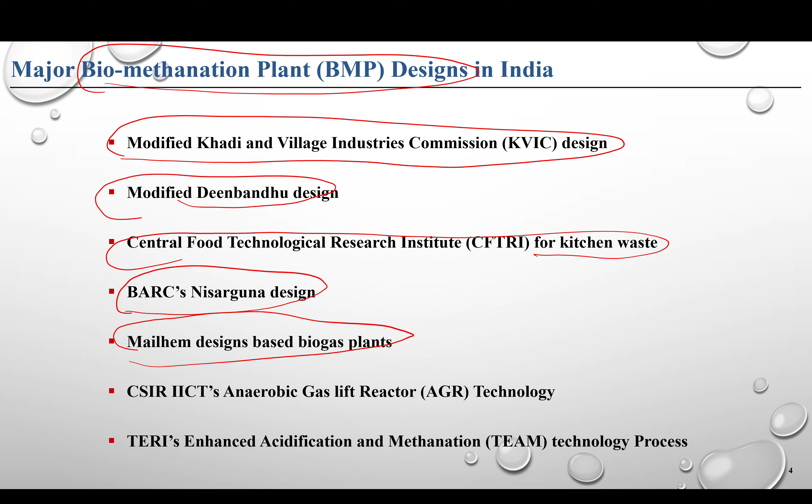So while we went on these visits to different plants across India, we found these are the major biomethanation plant designs in India. It can be the KVIC design, the modified Khadi and Village Industries Commission design. It can be the modified Deenbandhu design. It can be the CFTRI design, which is mainly for kitchen waste. It can be the BARC Nisargruna design, or there is Mailhem's design. Mailhem is one of the biggest companies that has biomethanation plants in India.

And then we have CSIR-IICT's AGR technology, anaerobic gas lift reactor, and then you have TERI's TEAM technology, so enhanced acidification and methanation technology. So these are basically the different sets of designs that we found, where we did this analysis and found the different types of biomethanation plants and the designs that were prevalent in India.

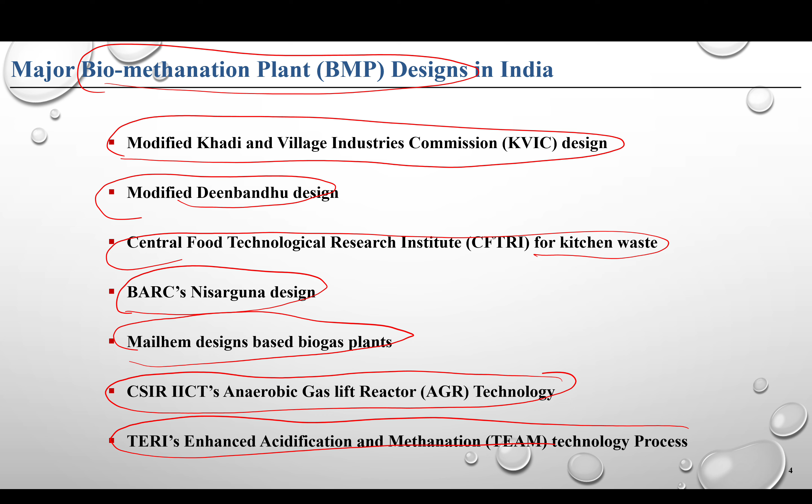Now coming to the data that we got, so if you see, majorly the plants that we have visited, we found the plants to be operational. Almost 88% of the plants were operational in India, and a small number of plants were not operational. The plants that were not operational were found to have stopped working during COVID, or just when COVID came. And what happened is that once COVID came, the waste input stopped, and slowly the reactor stopped working.

And then the municipality or the ULB did not take some effort, or did not do the retendering and manage the start of the biomethanation plant, and it was shut down completely. This is the fate of the five biomethanation plants in Delhi. So actually Delhi doesn't have any biomethanation plant as of now. The Delhi NCR has biomethanation plants, but not Delhi. Greater Noida and other places have biomethanation plants, but not Delhi.

The plants in Delhi were all operational before COVID, and after COVID they did not operate because of lack of waste. The manpower did not come, and then the operator ran away, something like that. Non-functionality was mainly because of the lack of funds, administrative issues, the tender getting expired, and all those issues. In some cases there was public opposition as well.

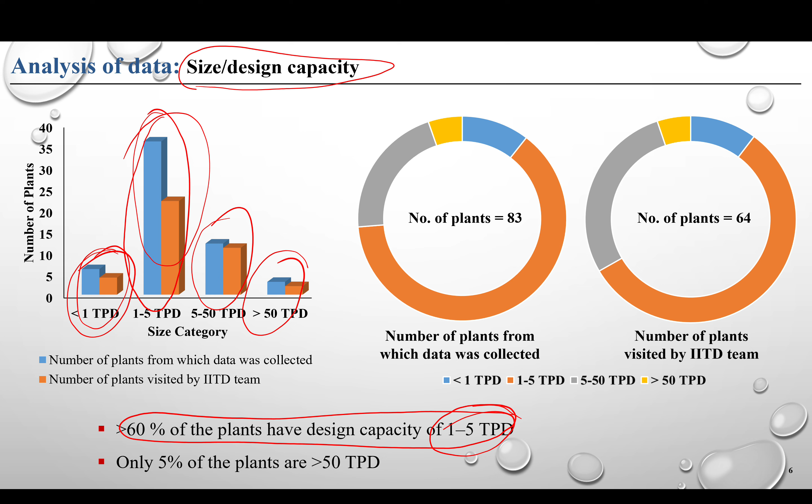We have some bigger plants as well. If I give you examples, in Pune city they have plants. They manage it in a decentralized way, and they have plants ranging from 5 to 10 TPD across various places throughout Pune city. But generally we have seen plants in the range of 5 TPD only, not beyond that, mainly because of financial and space requirements. And making a centralized big plant, like Indore is doing for the entire city, is not always feasible in India because of space and funds.

In terms of digester type, mainly we have seen three different types of digester prevalent in the biomethanation plants. It can be fixed type, floating type, or container type. In some of the cases we did not get any information on how they designed the biomethanation plant. So in fixed type, the dome is fixed and the dome doesn't float.

Or it is basically fixed to the boundaries, and whenever the gas is formed, it is just pressurized in the dome, and it goes for purification, or to the next chamber for purification or for conversion into electricity. In floating type, the dome is floating on the water, so it is sealed with water, as we generally know how the biomethanation plants are designed.

So floating type, they have major issues in terms of the gas getting leaked. So if you have too much production of gas, maybe because of temperature, maybe because of very good quality of organic waste, in that case the gas leaks out of the floating type digester, and it's basically wasting your resources. So the operators, the designers, they generally moved on from the floating type digester to fixed type digester, and hence we found that fixed type digester was more prevalent in the biomethanation plants.

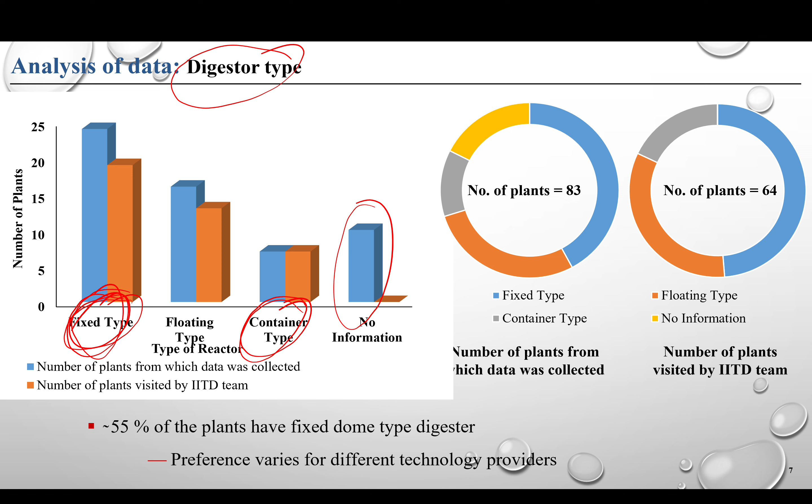In some cases we also got container type, so basically it's a cost effective solution. They have a container, and then they try to make a biomethanation plant by just making some holes and doing some connections in terms of pipes, and that is the most efficient way to do it. But mainly we found that fixed type is the prevalent type of digester available in India.

In terms of stages of digestion, we generally know there are two stages which is used across Europe. Either it can go for thermophilic and then mesophilic, or it can be both thermophilic, or it can be both mesophilic. So in India, we also have almost both the different types of design. Slightly the two-stage digester, where the new digesters were coming with a two-stage mechanism. So in that you have either a first stage aerobic and then the anaerobic one, or you have both the anaerobic stages. Mesophilic and then again mesophilic, or thermophilic and then mesophilic.

And then you also have a single stage digester. So generally what we have seen is that for the single stage digester, the methane yield is less. If you're going for a two stage digestion, the process is more efficient, and you get more methane yield. That is what the data we got while we did this project. And the single stage also requires less space, but two stage requires a little bit more space, more cost, and all those things. But overall you get more methane and biogas yield.

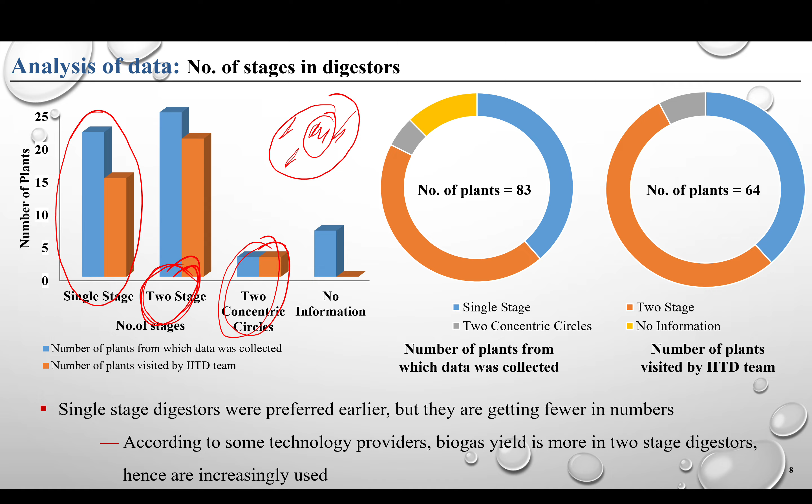You also have two concentric circle based design. You have one circle like this, and you have another circle like this, two tanks where inside you have maybe a thermophilic zone, and then you have a mesophilic zone. So you are basically combining two single stage digesters in one zone. So that also was seen in some of the cases where they are doing biomethanation. Again, this kind of design saves space, but it requires a lot of management in terms of design and operation.

In terms of digestion process, you have two types of digestion process. Either it can be high rate or it can be low rate. In high rate, generally what we consider is that if you are either heating the reactor, or you are mixing, or you are providing both, then we consider them as a high rate digester. If you are not doing any one of these, we consider them as a low rate digester. So in high rate digester, as the name suggests, you will produce more methane yield because you are providing mixing, you are providing heating.

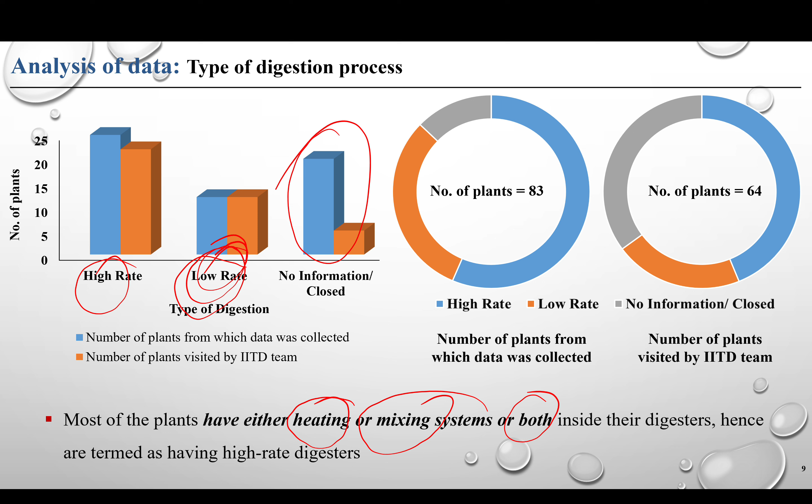And the low rate digesters are the old digesters, generally what we have seen. So the methane yield is less compared to the high rate digestion process. And in some of the cases, we were not very much sure about what was going on inside, because the operators and the person responsible, they don't know whether heating is going on inside or not, or mixing is done or not. So these are some of the challenges that we have faced, and I will discuss that in the later part.

In terms of inoculum, it is also very important, because that is the main microbes that are going to work for this biodigestion process. Prevalently it was cow dung, which is easily available in India, because we have a lot of cows, and a lot of places where we see a lot of cow sheds. So they get cow dung very easily. So generally they use cow dung for inoculation in the biomethanation plant. But in some cases, we have seen that cow dung is also added with some bacterial culture. So they take the bacterial culture from various labs.

Okay, they have some culture that can reduce your startup time. So they add cow dung, and with that they add the bacterial culture as well. And every 6 months or maybe 1 year, depending upon how quickly your reactor is getting upset, they add again cow dung and the bacterial culture regularly for proper maintenance.

In some cases, we have also seen cow dung and jaggery both are used. Sometimes they use cow dung and jaggery, or sometimes cow dung and bacteria, or maybe jaggery and bacteria, because sometimes cow dung is not available in some places, in the plants that are in the city area. There getting cow dung is not that easy, so for that case they add jaggery. And they also add some enzymes and some bacteria from private labs. They buy it from the lab, and then they add that as well.

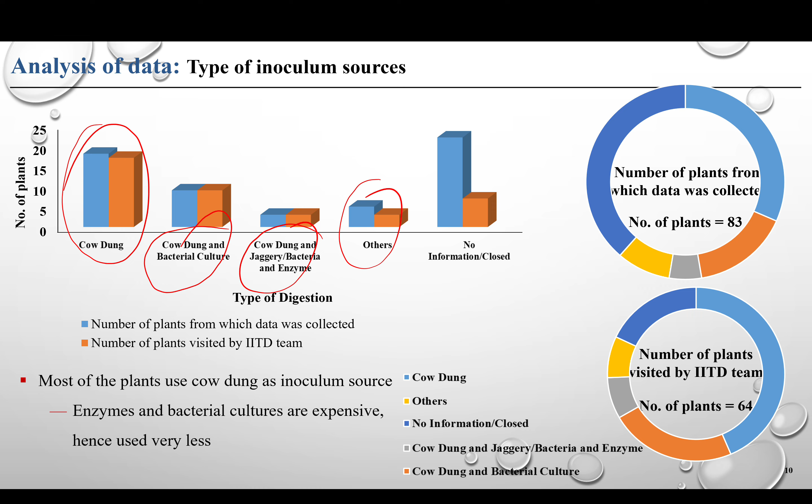In a few other examples we have seen, they are adding sewage sludge as well, or the raw wastewater as the inoculum, because they don't have any other source. But mainly what we have seen is the cow dung is the most prevalent inoculum source for this biomethanation plant.

So overall, how the biomethanation plant operates and what the process in India is, I can show you here. We generally know what happens in a biomethanation plant, but this is what really happens in the biomethanation plant in India. So first you get the mixed household waste, basically the unsegregated municipal solid waste, where you have the plastics, the organics, and everything inside.

And generally, what I have seen is that none of the cities are doing segregation, which is one of the important things if you are applying any process for management of municipal solid waste. Only Indore is doing almost 90% or maybe 95% segregation, and they are following a good model of implementing it with NGOs and fining the people if you are not segregating your waste at home. So if you leave aside Indore, it's an exception for India.

The biomethanation plants get this kind of mixed waste, and the mixed waste is first of all segregated just before the waste is received in the biomethanation plant. They have a segregation unit maybe just before the plant, or inside the plant campus they get the waste, and then they do manual segregation. They segregate the organics and then the inorganics. After the first stage of segregation, they again do some pre-processing.

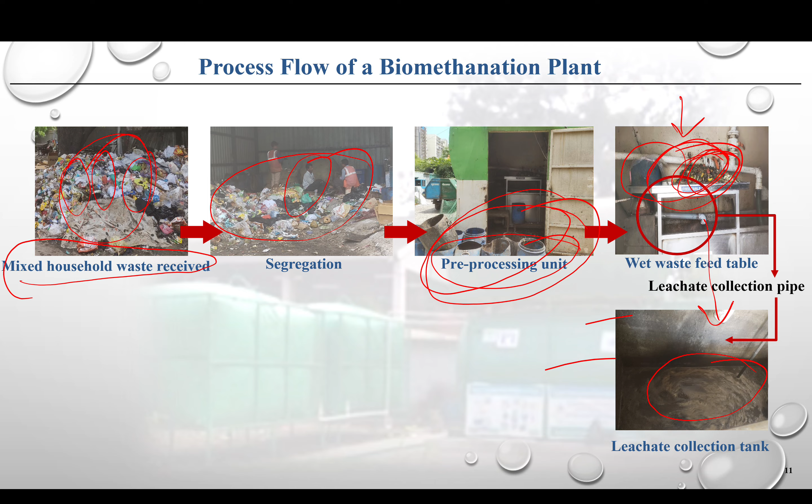So basically they make a slurry out of it, and after mixing and grinding, it becomes a leachate kind of thing, a black slurry. This slurry is collected in the leachate collection tank, and then it goes to the digester. Some part of the leachate is recirculated back into the process itself, because they maintain the amount of microbes, or increase the retention of the microbes in the digestion chamber.

And it also decreases your consumption of fresh water, because you need some water when you are grinding the organic fraction of municipal solid waste and making leachate. So that is one of the advantages of recycling the leachate. And in the output, you have the slurry, the digestate, that is coming out.

Generally the output slurry is kept in a drying bed for maybe a few days, because it will dry, and after drying it becomes a kind of organic fertilizer which can be either discarded or sold to the villagers or to the farmers.

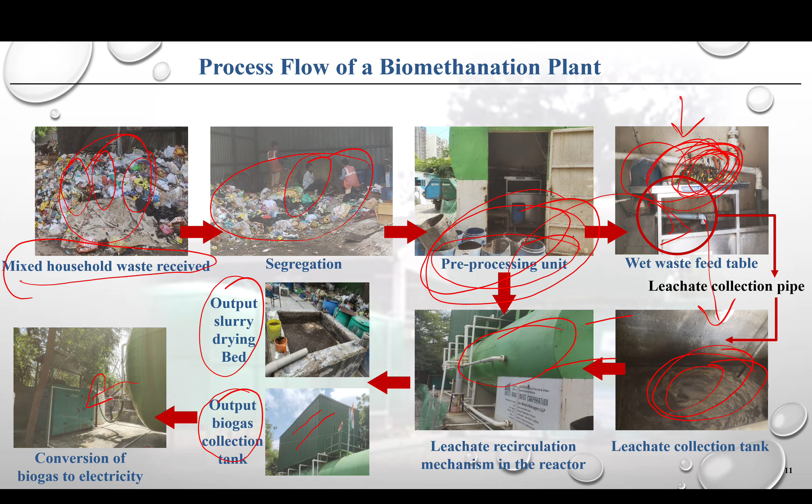And you also have the output biogas. Generally the output biogas is collected on the top of the reactor, and in most cases this biogas is unpurified. They don't purify this biogas. They have a biogas diesel engine, a kind of modified DG. So they just pump this biogas into the DG set, which converts it into electricity, and this electricity is very small in amount, so they don't sell it back to the grid. They just use it for their own captive consumption, which reduces their operating cost.

Overall, biogas is one of the main outputs of the biodigestion or biomethanation process. We can also have bio CNG, but bio CNG has more than 95% methane, which requires proper processing of the impure biogas from the biomethanation plant. So you need to have a purification system installed, and once you get bio CNG, you can cascade it, bottle it, and sell it to industries or anyone who wants to use it, or it can be converted into electricity and given back to the grid.

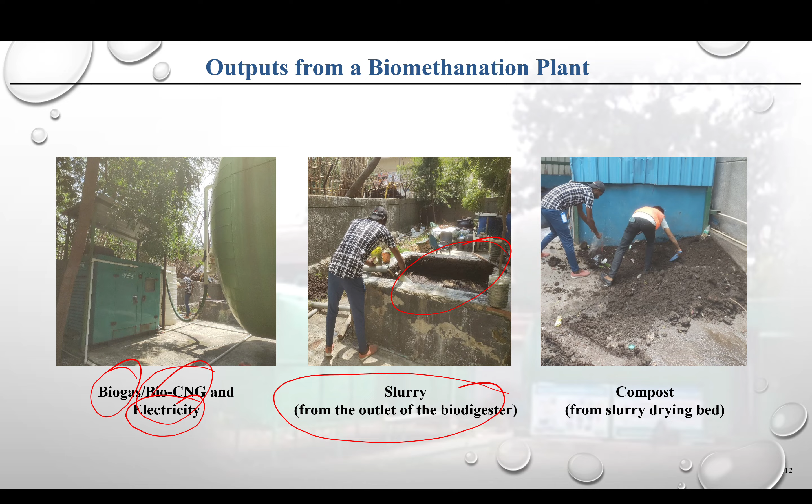We also have slurry coming out from the biomethanation plant, from the digester, and this slurry has to be dried, and after drying, some part of the water or digestate is recycled back, as I told you. And you also have the compost, the dried part. This slurry can also be sold, and it is sold in India as a liquid fertilizer in many places like Ahmedabad and Pune. They packet it and sell it at around 500 rupees per kg, and it is widely accepted at this price in many places in India.

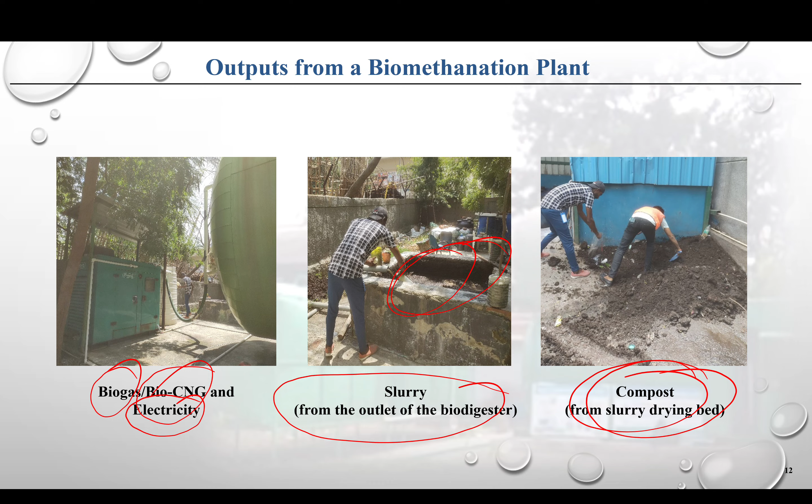In some places like Delhi, they are not able to sell the slurry or the compost, because there is no farming, and people have a stigma attached to this kind of compost. They say it's a waste thing, it will kill your crops and all those things, so they are not able to sell it. They have to just dump it in low-lying areas.

So coming to the observations and recommendations after this entire project, and the feedback we can give to the ministry, because it was sponsored by the ministry. First of all, we found that there is no record of design available on site. If you go to an STP, the sewage treatment plant, or a WTP, we at least have some record of design, like the design HRT and all those things. But at a biomethanation plant, there is no record of the design, at what temperature it is going to be operated, and all those things. So we don't have any information on that.

Waste segregation, as I told you, is a major challenge in India, but if waste segregation is done, these plants will be easy to operate, because you will be removing one extra step where you do the segregation and then go for biomethanation.

And what we found is that in the southern states, the plants are operating well, they are functional, and they are able to generate a good amount of methane, mainly because the temperature in the southern parts is higher compared to the northern part of India. In Delhi, the temperature goes down to around 5-6 degrees at night in peak winter, which is very bad for a biomethane reactor.

And the optimum temperature for biomethanation is around 40 degrees centigrade, which is very close to the temperature that we see in southern states. If we talk about bio-CNG and bottling plants, in that case, they are mostly profitable, especially for the bigger ones. So if you talk about bottling for the smaller plant, no, that is not a good option, because it will not make sense profitably. So generally what we found is that if you go for bigger plants, around 30 to 50 tons per day, in that case bottling and selling the bio-CNG is profitable.

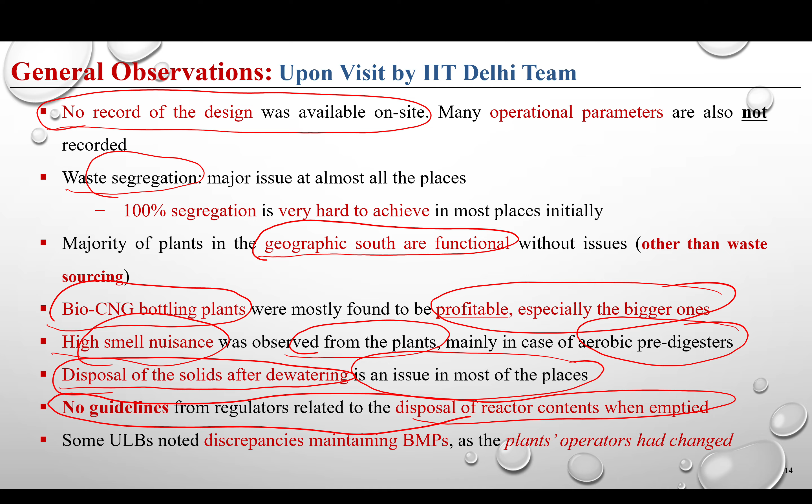There are no guidelines in terms of disposal of the reactors whenever they are emptied. Suppose a biomethane reactor is emptied, and the sludge, the liquid inside it, has to be discarded, but there are no guidelines on what the operator should do with this kind of sludge. Generally what we see is that they pump all this waste, dilute it and put it in the sewers, and the STPs get a shock load, and that is again a challenge for the STP. But that is not how we should manage these kinds of scenarios.

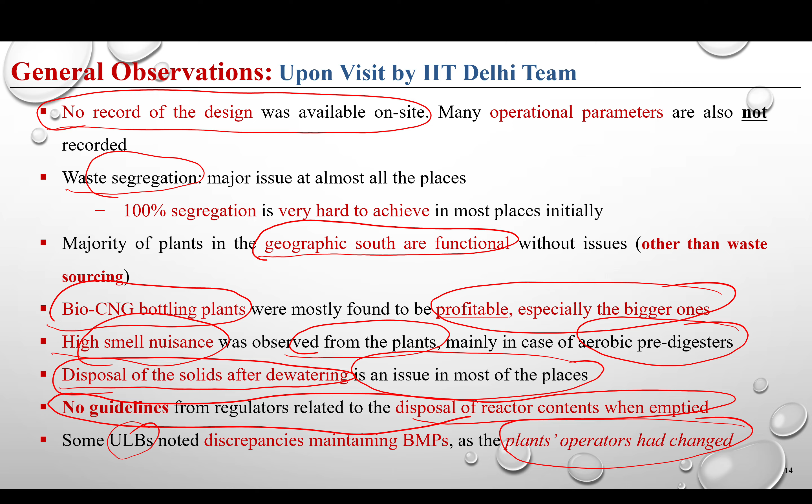Then there are some problems with the ULBs as well. So what happens is that suppose a company has designed the biomethanation plant, and it operated for 5 years, and then after 5 years the tender has expired, and it goes to a new company, and the new company doesn't want to operate at those design guidelines, or doesn't know how to operate, because there is no exchange of information from the first one to the last one. So in that case the plants are all stopped. This is what generally happened during COVID. Before COVID someone operated the plants, and after COVID someone else came. That is a challenge, and they don't know how to operate the plant.

We had discussions with plant operators, and they told us getting segregated waste is a challenge. That is what we generally found out. And then selling the outputs, the slurry, the compost, the biogas, is a major challenge. And as I told you, we found that if the plants have capacity of more than 30 tons per day, then it makes economic sense to bottle your biogas or bio-CNG and sell it, or produce electricity and put it back to the grid by net metering. That is basically advantageous for the plant operator, that they sell back the bio-CNG or electricity generated by this waste.

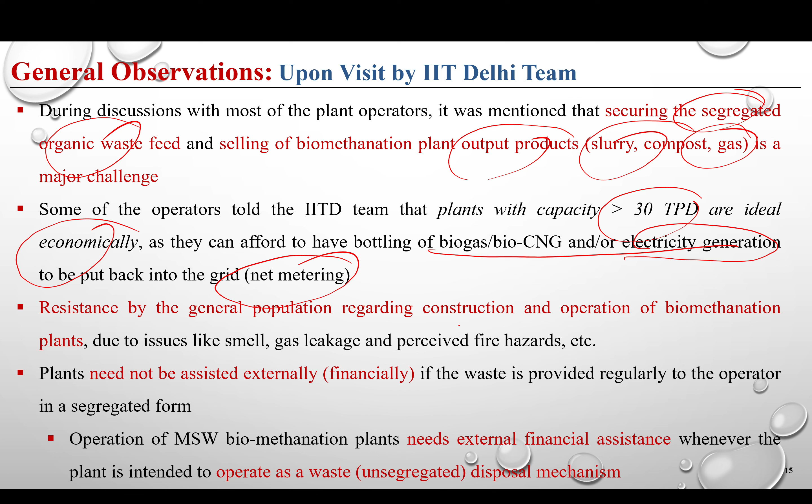Then there is resistance by the general public that we found during construction. Many plants were stopped during the construction phase, and some of them were stopped during the operation phase, because they thought that the balloons where the gases are stored are hazardous, and they can leak sometimes and create fire nuisance and all those things. Smell and gas leakage are some of the challenges that they anticipate. So they stopped all the operation and construction of these kinds of plants.

I think in Pune, I remember visiting a plant which was just built beside a power grid, and I was shocked to see that a biomethane plant with so much biogas, a big digester, big balloons, was just built beside a grid station supplying electricity for the entire city. It is basically very hazardous and prone to any kind of hazard.

Then the plants needed some external financial support. There is no incentive for the operators to manage waste, to segregate the waste, to collect the waste, and then produce revenue or produce biogas. So they need some incentives. They need some financial support from the ULBs, from the municipality. That is what we found. And because they are doing segregation, and they are managing the biomethanation process as well, they need some amount of financial support.

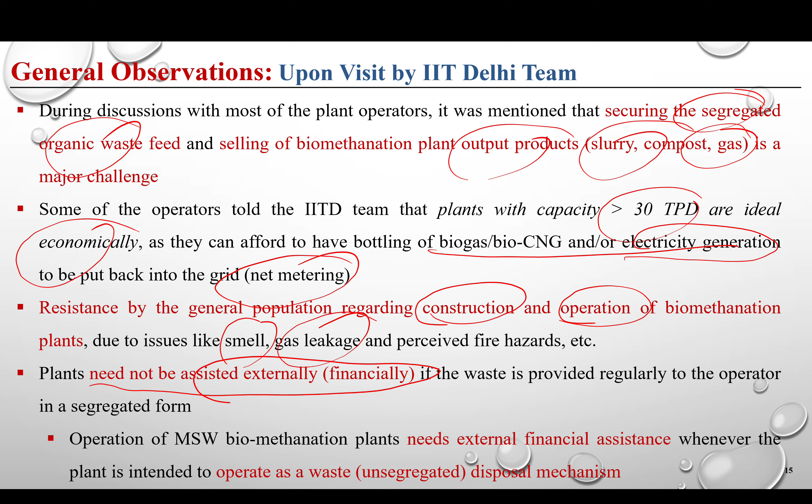Overall, this project was funded by CPHEEO. So we gave some recommendations to CPHEEO. I don't know how active they will be to implement our recommendations and take them forward, but we gave them some recommendations. Some of them are highlighted here, like keeping a record of the design parameters. When we go to an STP or WTP, we know these are the design parameters, these are the inlet parameters, these are the outlet parameters, but nothing like that is present currently in any biomethanation plant across India.

So we told them that at least you should have some basic design guidelines like OLR, SRT, reactor volume, your feed inlet, your water content, and all those things, at least in the plant itself. Measuring the key parameters like amount of gas generated, amount of moisture for which it is designed, and all those things. Then there are no or negligible protective measures for the biogas storage balloons. We have seen the balloons getting leaked or getting stolen from the sites, and that is one of the challenges. So we told them to implement proper protective measures in the field.

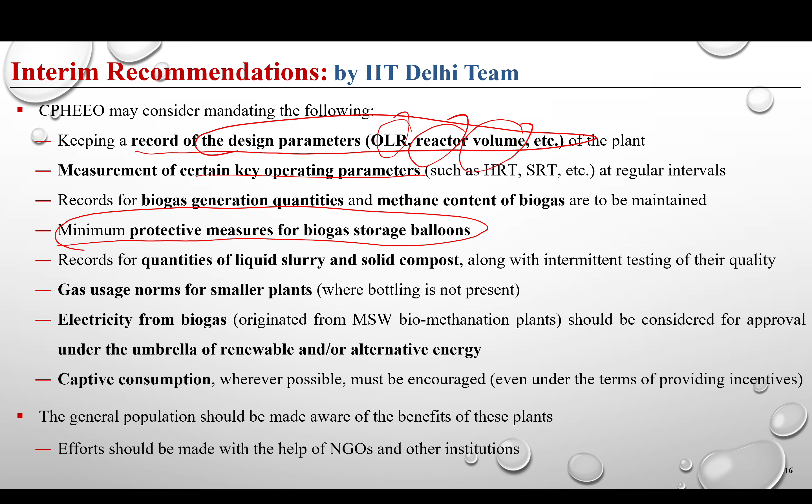Also to record the amount of liquid slurry and the amount of solid compost that they are producing, because if we have the data, we can look into it and suggest more changes to the process as well. And gas use norms for the smaller plants are not present, because if they are not doing bottling, what will they do? In many cases we have seen that they produce biogas and then they just flare it. That is not a very good option. Some of the smaller plants are not able to bottle it, they don't know what to do, there is no direction available, so they just flare the biogas.

And electricity from biogas should be taken under the umbrella of renewable and alternate energy. I think in that respect some work has already started, so they should consider this as a renewable source of energy and take it forward. In terms of captive consumption, wherever possible, they should encourage captive consumption without giving it back to the grid. In some cases the operators do captive consumption. In some cases they are not allowed to, and have to give it back to the ULBs.

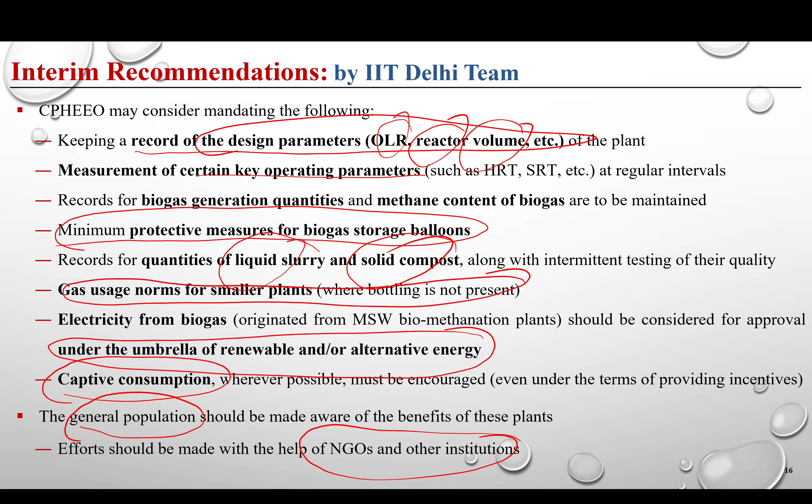And the ULBs should also involve some NGOs and spread awareness among the common people, to tell them that these plants are not going to harm them. They are good for society, because they are managing your waste, and you should allow these plants to be operated. I have seen many examples where the plants were operated, but there was some complaint from the local public, and the plant stopped, and now the waste is just lying around in the campus or in the streets. So these are the challenges that we have faced, and we have given some recommendations based on our input.

Overall, I think I have come to the end of my PPT, and this is the team that did the survey, and almost all of them have graduated and completed their PhD. Professor Nema was the main PI who helped us in carrying out this project. I visited almost all the plants with these students to see what the challenges are with these plants, and then we got the data.